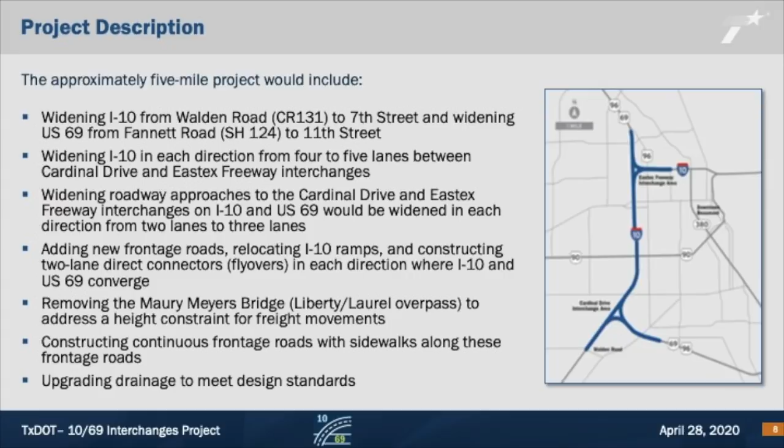On I-10 and US 69, lanes would be widened in each direction from 2 lanes to 3 lanes. The project includes adding new frontage roads for continuity, relocating I-10 ramps, and constructing 2-lane direct connectors, also known as flyovers, in each direction where I-10 and US 69 converge. It also includes removing the Maury Myers Bridge, also known as the Liberty Laurel Overpass, to address a height constraint for freight movements, constructing continuous frontage roads with sidewalks, and upgrading drainage to meet current design standards.

Why is this proposed project needed? The purpose of the project is to alleviate congestion, to provide a more reliable transportation and evacuation route, to enhance connectivity and mobility, and to address safety.

The 2 I-10 interchanges with US 69 in Beaumont are a critical part of the national strategic freight network and hurricane evacuation capacity in southeast Texas. As you can see in the graphic, congestion is expected to increase based on our traffic predictions.

As of today, 161,750 vehicles a day travel within the project area. By 2045, this number is expected to increase to an estimated 236,900 vehicles a day.

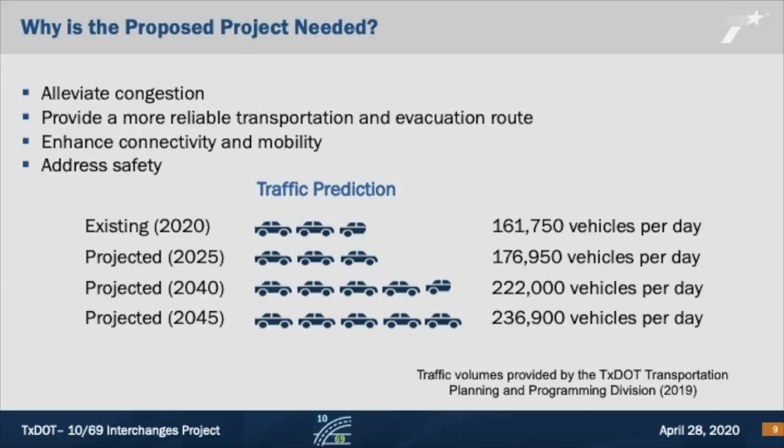Next, we would like to provide you with a summary of our public involvement efforts, giving you a quick look at how TxDOT used public feedback to guide the decision-making process. TxDOT held the first open house public meeting on April 16, 2019 at the Beaumont Civic Center. The public meeting was held to inform the public of the proposed I-10/69 Interchanges project and gather comments from the public, elected officials, and other interested stakeholders.

TxDOT provided a series of online surveys throughout the public involvement process, including during the first public meeting. In total, TxDOT received nearly 600 comments from the public as part of the first public meeting outreach effort. The Beaumont District also received helpful feedback during the 2019 South Texas State Fair from the public visiting the TxDOT informational booth.

TxDOT also learned from the first public meeting that the public ranked reduced congestion as the #1 priority they wanted addressed as part of the project development. In addition, TxDOT asked the public to prioritize ramp locations, and in that case, the College Street ramp ranked most important to preserve. Finally, TxDOT proposed a series of alternatives at the first meeting.

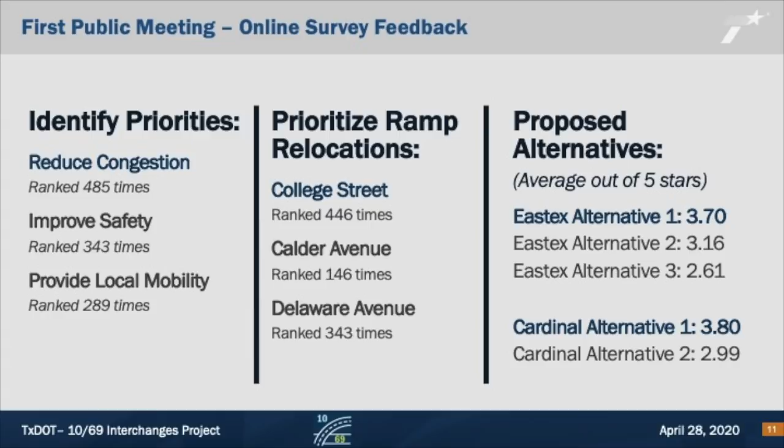Along with additional research and findings gathered during the environmental process, as well as this helpful public feedback, the Beaumont District narrowed the alternatives, which were presented at the second public meeting. TxDOT held the second open house public meeting on September 17, 2019 at the Beaumont Civic Center. During this meeting, the Beaumont District continued to gather public feedback, as well as introduce potential aesthetic concepts featured as part of another online survey provided before and during the public meeting.

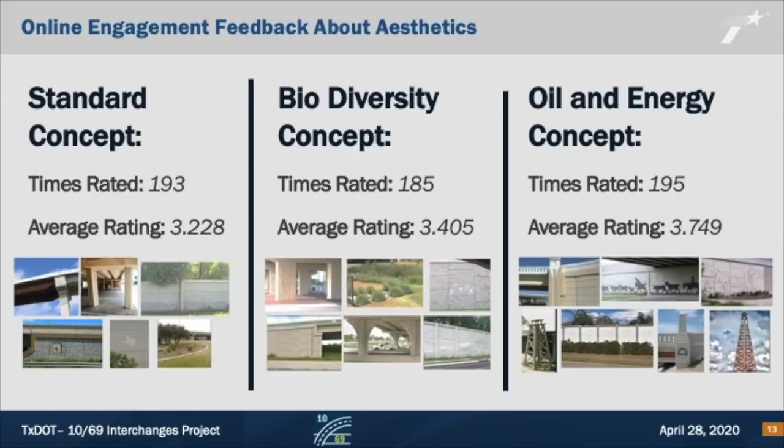In total, TxDOT received more than 200 comments from the public as part of the second public meeting outreach effort. From September 10, 2019 to October 11, 2019, TxDOT Beaumont District also received public input on the various aesthetic options being considered from the online survey. The oil and energy design concept ranked highest from the public.

In addition, TxDOT conducted many stakeholder meetings and one-on-one meetings during the public involvement process, such as a Bike and Pedestrian Stakeholder Meeting on August 22, 2019, ongoing communications with Christus Hospital, ongoing communications with the Spindletop Rotary Club regarding the annual Southeast Texas Soapbox Derby along with the Derby representatives, and ongoing communications with the Meyers family to discuss ways to continue the Maury Myers legacy.

Let's switch gears now and talk about the proposed design changes. The updated design includes widening I-10 from Walden Road, or County Road 131, to 7th Street, and widening US 69 from Fannett Road, which is State Highway 124, to 11th Street.

The roadway approaches to the Cardinal Drive and Eastex Freeway interchanges would be widened in each direction from 2 lanes to 3 lanes. You can view these images in more detail on the TxDOT website as well.

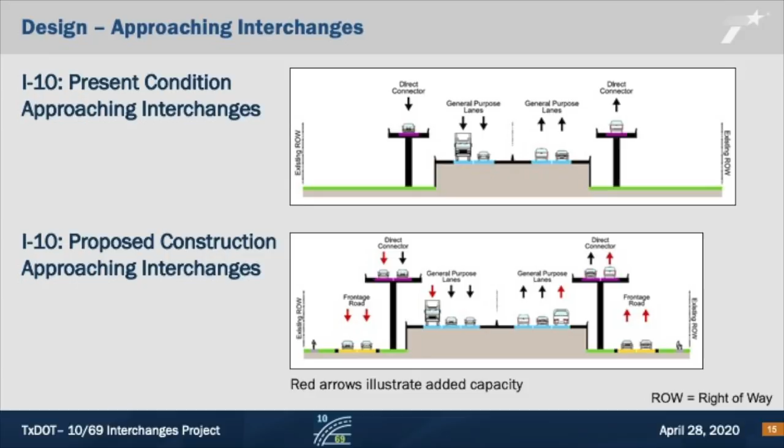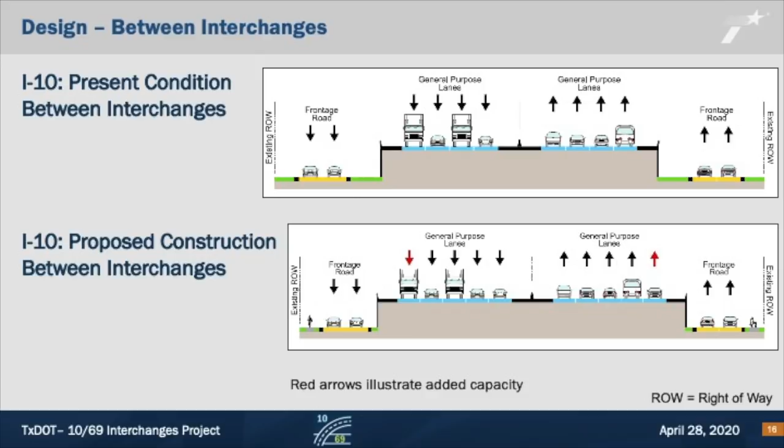Between the Cardinal Drive and Eastex Freeway interchanges, the roadway will be widened in each direction from 4 lanes to 5 lanes.

Over the course of the next few slides, we'll be focused on the project renderings, what the project will look like. We recognize this may be difficult to see here. You can view these renderings in more detail on the TxDOT website.

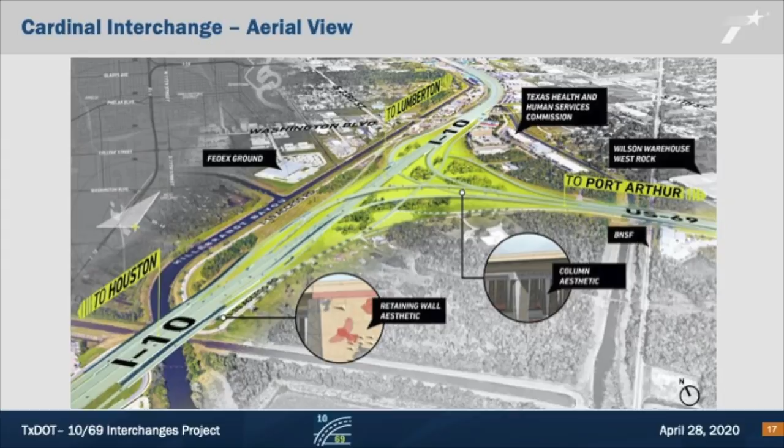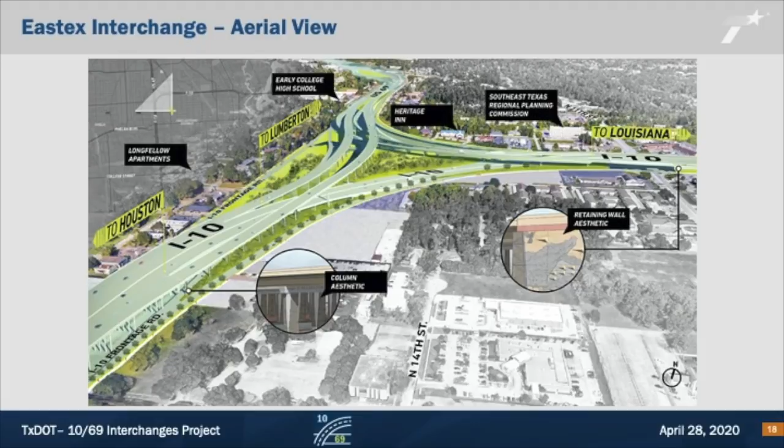This is showing the aerial view of the proposed Eastex interchange. The drawing shows the connection of frontage roads through the interchange, providing more local connectivity. The proposed design also provides for increased capacity on the direct connectors between I-10 and US 69.

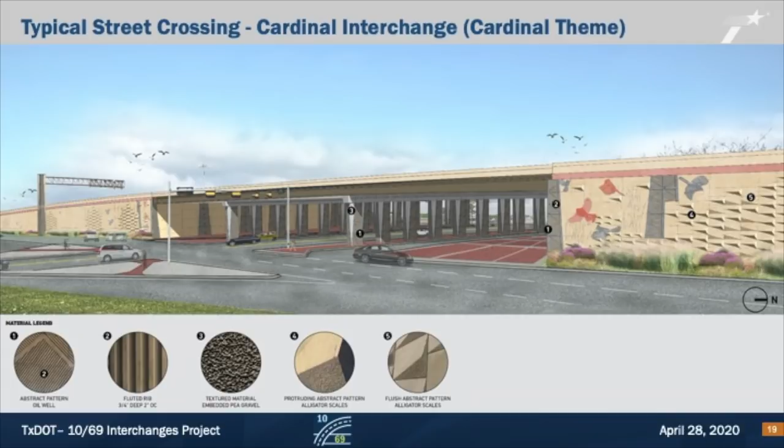The next few images we'll be showing you provide a proposed future look at the aesthetics design of the project area. This one in particular shows what a typical street crossing near the Cardinal interchange would potentially look like. We also wanted to point out that the public ranked oil and energy, as well as biodiversity themes, as the most popular aesthetic designs from our online surveys. Within each of the following designs, you'll see that these elements are included in each one.

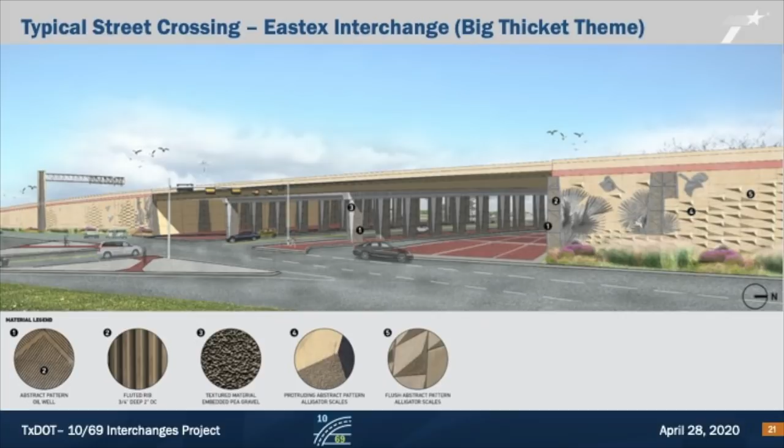Again, this image shows you a proposed future look at the aesthetics design of the project area. This view looks at a typical street crossing design at the Eastex interchange. This last aesthetic design theme focuses on a typical street crossing on the Eastex interchange.

The proposed project also includes removing the Maury Meyers Bridge, otherwise known as Liberty Laurel Overpass, to address the height constraint for freight. TxDOT continues discussion with the City of Beaumont and the Meyers family about the aesthetics plan to maintain the commemoration of this connection.

TxDOT considered raising the Maury Meyers Bridge to accommodate the freight clearance. However, additional impacts to adjacent properties and the local roadway would result from changing access to the bridge from intersecting streets. Such a change would also have eliminated access to 11th Street and Phelan Boulevard, since the bridge approaches would have to be extended and would end farther east and farther west, respectively.

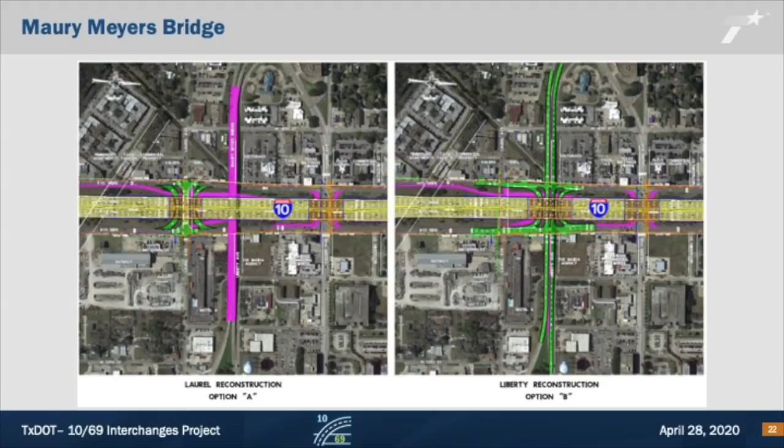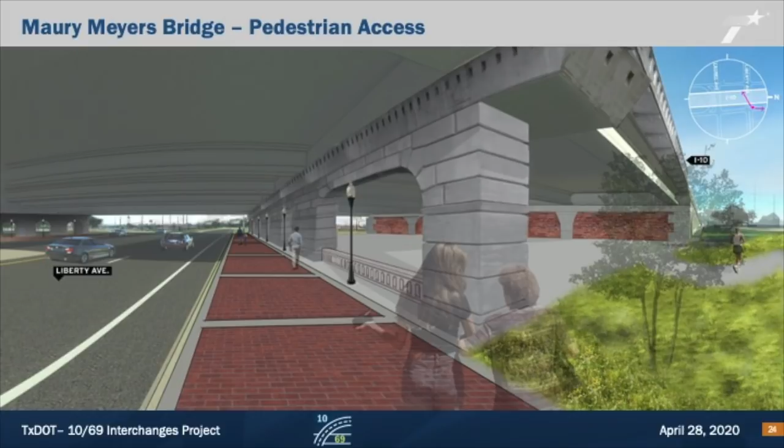This rendering shows the view underneath the proposed I-10 overpass with pedestrian connections. Also highlighted here are similar columns and lamp posts that were used on the original Maury Meyers Bridge.

The proposed project is consistent with the Southeast Texas Regional Planning Commission Metropolitan Planning Organization efforts. This includes the Metropolitan Transportation Plan 2045 for the Jefferson Orange Hardin Regional Transportation Study Area and their 2019-2022 Transportation Improvement Program. The proposed project will be funded with a combination of federal and state funds for a total of approximately $500 million.

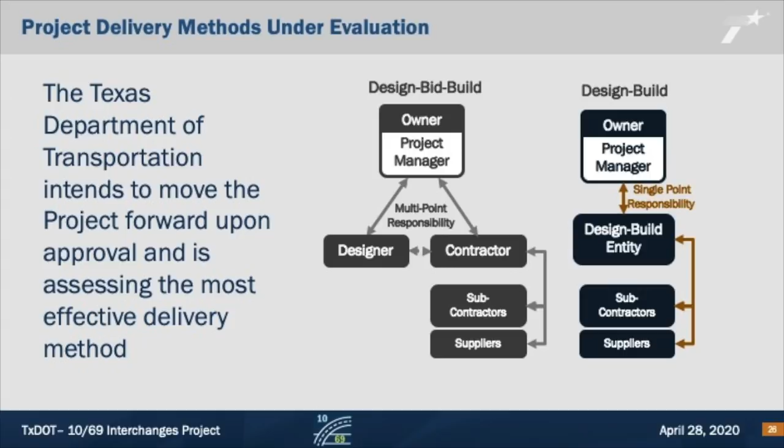2 project delivery methods are being evaluated, which includes a design-bid-build process and a design-build process. The Texas Department of Transportation intends to move the project forward upon approval and is assessing the most effective delivery method.

The environmental study conducted for this project complies with the National Environmental Policy Act. In addition, the environmental review, consultation, and other actions required by applicable federal environmental laws for this project are being or have been carried out by TxDOT pursuant to 23 United States Code 327. This also includes the Memorandum of Understanding dated December 9, 2019, executed by the Federal Highway Administration and TxDOT.

The environmental study identified and assessed potential impacts by the proposed project to the natural and human environment, including air quality, archaeological resources, non-archaeological historic properties, community and social impacts, biological resources including threatened and endangered species and vegetation types, hazardous materials, indirect and cumulative effects, traffic noise, and water resources.

An environmental assessment was conducted for the proposed project. A copy of the environmental documents and technical reports that are available for public review can be found on the TxDOT website. As proposed, the project may impact less than an acre of wetlands.

These impacts will be authorized under a U.S. Army Corps of Engineers permit.

Portions of the project area lie within the 100-year floodplain. Design of this project will be conducted in accordance with the TxDOT Hydraulic Design Manual. Adherence to the TxDOT Hydraulic Design Manual ensures that this project will not result in a significant encroachment as defined by FHWA's rules. A traffic noise analysis was also conducted in accordance with state and federal guidelines.

www.txdot.gov. We wanted to also highlight the estimated project timeline. Look for the green 'We Are Here' arrow, which indicates where we are in the project process right now. The virtual public hearing and availability of the draft environmental assessment phase is underway, and in the summer will focus on right-of-way acquisitions and utility adjustments.

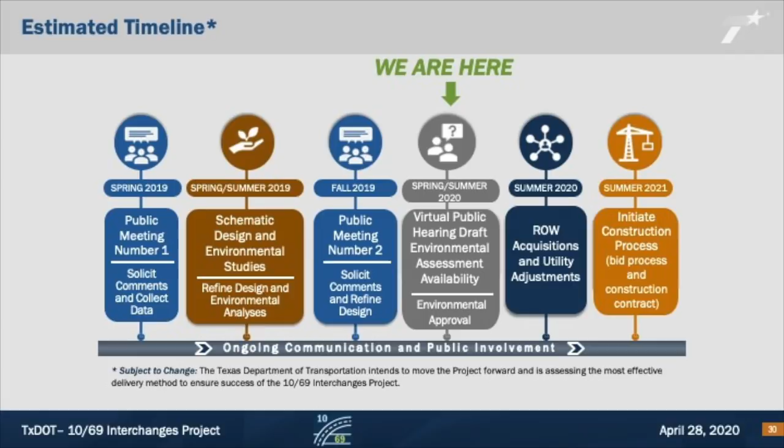Construction, if the project is approved, will begin in summer 2021 and is anticipated to be completed in approximately 5 years. Continuous construction communication will be provided on the Beaumont District Twitter site, and will feature more information about how to stay informed in just a few minutes.

Let's recap how you can provide input about this project. The first way you can share your input is to provide your verbal testimony, similar to an in-person public hearing. The verbal testimony option is available starting at 6 p.m. on Tuesday, April 28, 2020, and will be available until 11:59 p.m. on Wednesday, May 13, 2020.

Please call 409-898-5880 and leave a voicemail with your comment during that time. Your comments will be recorded and the response will be included in the virtual public hearing summary report. The voicemail system allows you to record a voicemail up to 3 minutes long, similar to the time provided during our standard in-person public hearing practice.

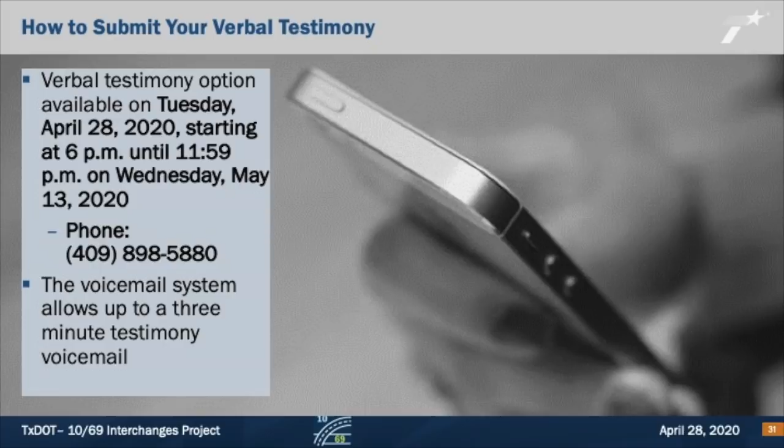In addition to providing the verbal testimony voicemail option, TxDOT is also encouraging written comments. Comments must be received or postmarked by Wednesday, May 13, 2020 to be included in the virtual public hearing summary report. You can submit written comments in the following ways.

Email your comments to bmtprojects@txdot.gov. Mail your comments to TxDOT Project Manager, Texas Department of Transportation, 8350 Eastex Freeway, Beaumont, Texas, 77708.

Submit your comments online. Visit www.txdot.gov. In the Search TxDOT box in the upper right-hand corner, enter 10/69 Interchanges Virtual Public Hearing. Click on the Submit Your Comments button at the top right of the page, or click on the email link at the bottom of the page.

Again, most importantly, please be sure to submit your written and verbal testimony comments no later than Wednesday, May 13, 2020, which is 15 days after the original April 28, 2020 website posted date. The responses to your comments submitted during the comment period will be included in the virtual public hearing summary report. This report will be posted to the TxDOT website within the next few months.

We encourage the public to stay informed about the project in the following ways. First, sign up to receive email updates. Visit www.txdot.gov and in the upper right-hand corner, enter 10/69 Interchanges Project in the search box. Click on the project page and then click on the upper right-hand button called Subscribe to Updates. When there is a project update, an email will be sent to you.